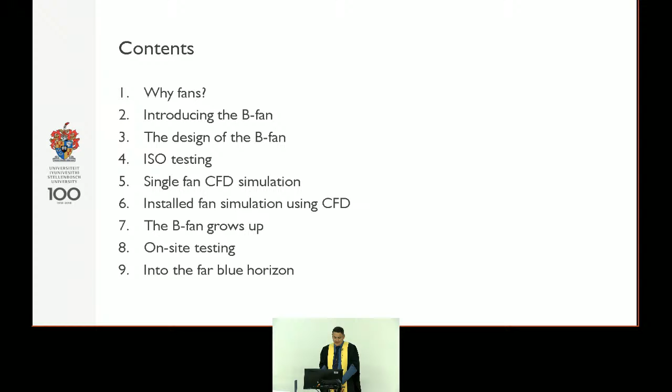So I always have to say what I'm going to say. A bit of background: why are we doing fans and what does the fan look like? Then we're going to talk about the B fan, and then we have to go technical a bit. I'm sorry, there will be some integrals and stuff, and look at the design, how we test it, and then how we simulated it. François, you're going to feature heavily here. And then some more simulation, and then eventually where we actually ended up installing it. And then where are we going with this?

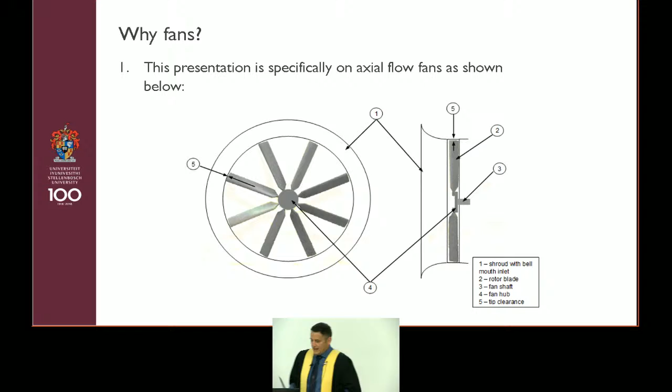So when I talk about a fan, I quickly ran into the office. I had to grab a fan blade. This is something that a student printed a few years ago. The most important thing is that if you look at the blade, it has got an airfoil profile. So it looks like a wing. It's got a wing shape. If you look at the fan itself, it's quite a simple object. It's not that difficult to imagine.

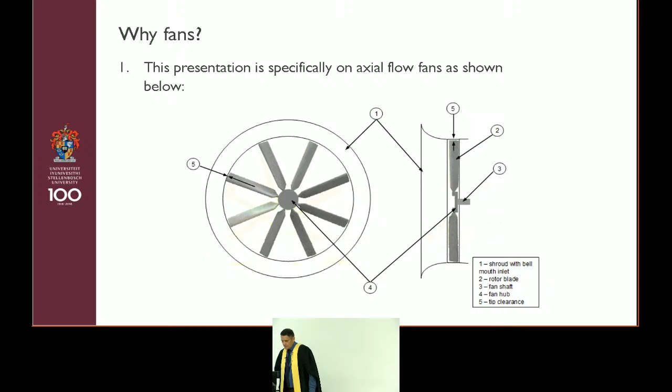This entire component is called the rotor, because it rotates. It's got a shaft, and that little bit in the middle is called the hub, where we attach the blades. And then we've got the rotor blades over there, and they sit in a casing, which we also call a shroud. In this instance, the casing has got a bell mouth, so it's got a nice inlet to reduce the losses, so the flow likes coming into the fan. And then, importantly, between the blade and the casing, there's a clearance that we refer to as the tip clearance, and that also plays quite an important role in the design process.

This first bit of information: I have known about this paper for about 10 years now, that was written on fan energy consumption, or electricity consumption, actually, in Europe. And when I knew I had to do the speech, I ordered the paper from Fraunhofer in Germany, and it arrived about 2 months ago. The astounding thing is that they reckoned in 2002 already that axial flow fans in Europe consume 200 billion kilowatt hours of electricity in a year. To put that into perspective, I quickly jumped onto the wonderful internet Google. In South Africa, we consume more or less, depending on who you speak to, the same amount of electricity in a year. And the other thing that's important, the Europeans reckon they can save about 10 to 20% of this energy by just improving the design of the fan.

Now, why is a fan so important for us? Fans give us the ability to remove heat from an object by means of convective heat transfer. Convective heat transfer is what you get when air or water flows over a surface, and then you get the transfer of heat, or reduction or increase in temperature. And we can do that without using water. So we just blow air over an object.

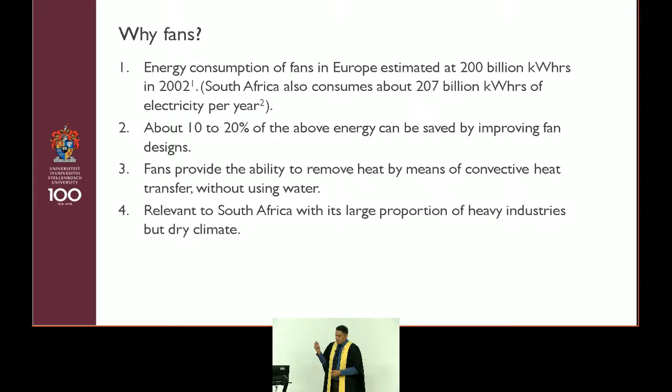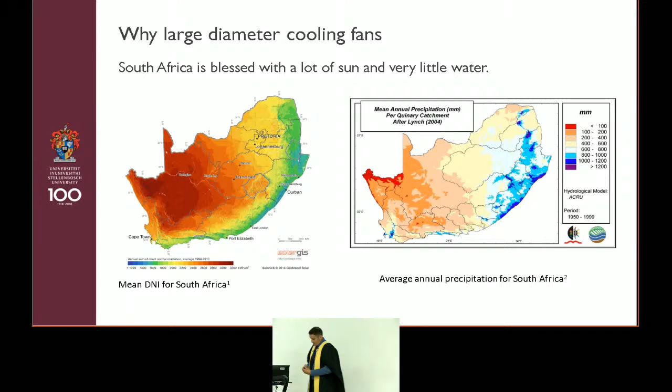So how a power station works: you take coal, burn the coal, you create steam. The steam is under pressure. You run the steam over a turbine that generates electricity. But to complete the cycle, so this is where the thermodynamics come in, you actually need to condense the steam back to water. And in South Africa, what we've managed to do at a very big scale is to use fans to do that condensation. In this specific power station, there are 288 of these fans. Each of them has a diameter of about 10 meters, and it's 45 meters above ground level. I don't know who of you have been 45 meters above ground. It's an interesting experience.

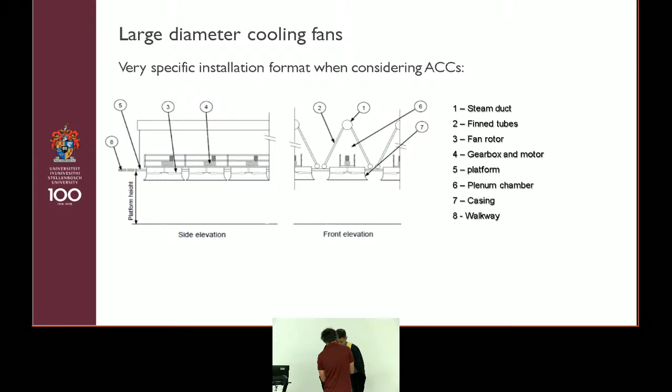So just looking at the picture, what does such an installation look like? Most importantly, the fan. The fan is what we're talking about. You've got the fan over there, and then above the fan you have these fin tube bundles. They're arranged in an A-frame format, and this is where the steam gets condensed. Up here at the top is where the steam enters, gets condensed to water, and gets pulled back into the power station. So you actually conserve the water. You don't evaporate the water into the atmosphere.

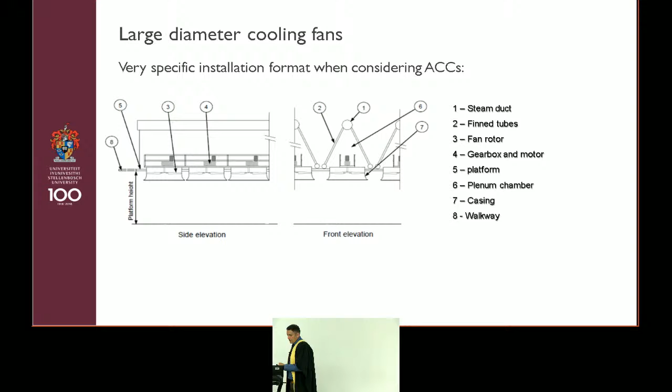One of the problems they have with these fans is when the wind blows over this power station, the fans that sit at the side of the power station. Normally the air would go through the fan like this. When the wind blows, that big fan sitting there at the side actually experiences what they refer to as distorted inlet flow. So it struggles to get air through. And you get all kinds of problems with the ability of the plant.

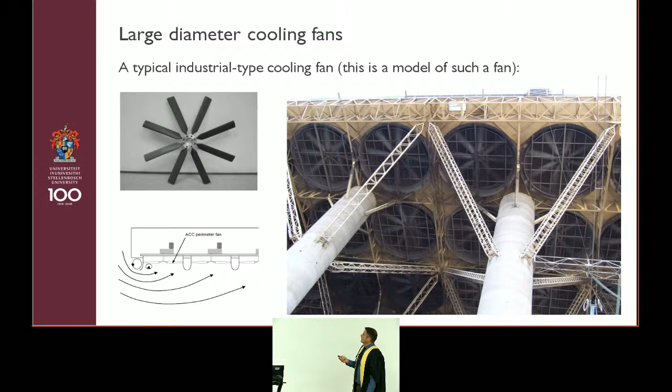If you actually visit these power plants, the people who run them will tell you that getting them to run stably was initially one of the issues. And the South Africans are really, really good at being able to run these power plants with wind blowing over them. But you do have occurrences where things can become a problem, and you can lose a bit of electricity, and I don't want to say too much, but it can typically lead to load shedding.

So back in 2005, Johann Bredell actually published a paper. What he showed in the paper is that looking at different fans, you can find that they behave differently when they're exposed to this distorted inlet flow. This is a measure which we define as the volumetric effectiveness, where we compare the volume flow going through the fan to the volume flow that would go through the fan under normal conditions, when it's just sitting out there on its own happily. You can see that the different fans behave differently. This is given as platform height, but it actually represents distortion of the inlet flow.

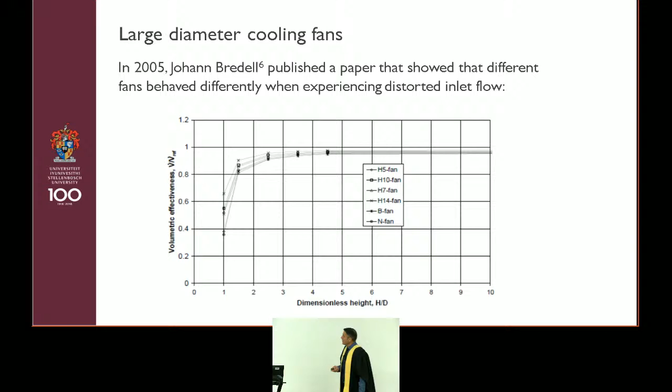And over there, you see a name already appearing. Part of this work showed that there's some potential in this fan that we refer to as the B fan. So enter the B fan. This is our star. The fan was designed by a person called Phillipe Bruneau. We have a bit of a thing going where we tend to name our fans after the people who designed them. So this was called the B fan.

It actually started as two fans: a B1 fan and a B2 fan. The only difference between the two was the profile of the fan blade. The B1 fan had what is referred to as the Clark Y profile, and the B2 fan had a NASA LS profile. The one was supposed to do better than the other, and there's just a small difference in the performance of the fan. The fan was designed to a very specific specification, which is actually a scaled power plant spec. It's scaled from an existing power plant to the size of the test facility that we have here at the university.

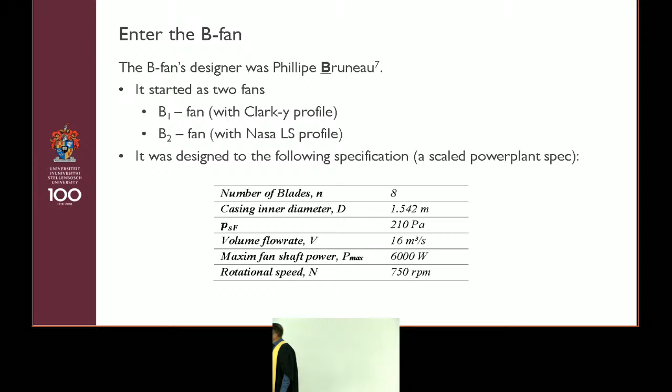The important thing is the pressure: 200 pascals sounds like a lot, but if you measure it in water, it's 20 millimeters of water, so it's nothing. There was a volume flow rate, a certain fan shaft power and a rotational speed that it had to adhere to. So this is where the equations come in.

When you design a fan, you start with the velocity triangles. I say to the students, when you do turbo machinery, there are a few things you need to know, and the first thing is velocity triangles. The velocity triangles show the behavior of this rotating blade. So you can in your mind actually see this blade moving through the air. If you stand to the side, and this is what I teach my students, if you get this, you're very good. You can go to third year.

So Johan, this is preparation for your exam in 2 weeks' time.

When you stand to the side in what we refer to as the absolute reference frame, you will see the air moving straight into the fan. Or it can be distorted, but let's say straight.

But this blade is actually rotating at a speed, which we write as omega R, where omega is the radians per second, the RPM, the speed at which the fan runs, and R is the radius of the fan blade, so at different places it has different radii. Put that together and you get the relative flow, the relative angle at which the flow is going to see this blade as it moves.

The flow will go over the blade, and hopefully it's well designed, so it will follow the blade nicely, and it's going to leave the blade at a relative vector W2. But you standing to the side, you're not sitting on the fan blade, so what are you going to see? To see the absolute vector, you need to add that rotational speed, omega R, to that relative vector, and then you get your absolute vector. This is what you will see if you stand to the side.

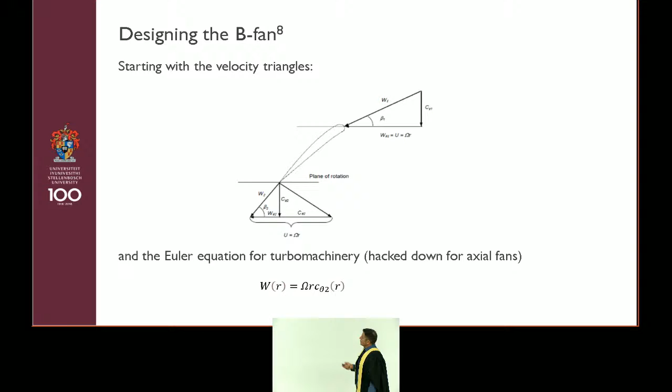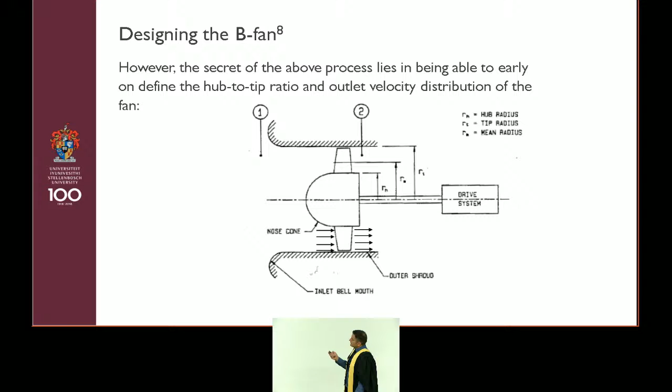When you design the fan, you first want to figure out what the size of the hub of this inner part is going to be, because once you have that, you know what the length of the blade is going to be. If you've got the length of the blade, then you can design the velocity distribution along the blade. If you've got the velocity distribution, you know what the energy transfer is going to be. If you know the energy transfer and you've got the efficiency, you can work back to the pressure rise. Okay, so we need to know what the hub diameter is going to be.

There was a guy called, I can't remember his first name, Fransje, you've still got the book. Van Niekerk. His surname is Van Niekerk. He published, actually in 1950, I think his thesis was published in about 1956 or 58, a work on how he developed this equation to calculate the optimum hub diameter of a fan for certain lift to drag ratios, for a certain amount of swirl at the hub. The swirl at the hub is that C theta 2 that you would exert at the hub, and then the flow coefficient at the tip, all depending on the design parameters that you want. From his equation you could get an optimum hub to tip ratio for a certain efficiency that you want for the fan, and that gives you the size of the hub.

Note that there's actually a limit to the amount of swirl you can put at the hub, because that helps you to solve it. Otherwise, you're going to be very busy and design fans that don't work as they should. So there's a limit to the amount of swirl you can exert at the hub of the fan. Wallis is also quite a popular author, used to be, on axial flow fans. He prescribed a limit of 1.1 for this swirl at the hub.

An interesting thing, there's quite a well-known textbook by Dixon that they use in turbo machinery. In that international textbook, there are only 2 South African names that I could find over the years. One of them is actually Van Niekerk, and the other is Professor Graham Smith at UKZN. They actually get referenced in that textbook.

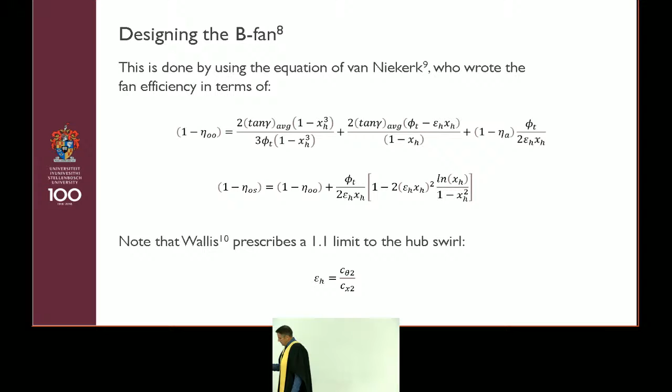So now we've got the hub tip ratio, and then it actually is just mathematics. We now need to design the outlet swirl angle, our swirl distribution. You can assume different equations for the swirl distribution. We usually use the format A R to the power N. Then we have what we call the simple radial equilibrium, which basically balances the flow distribution, the swirl, and the axial flow through the fan with the pressure distribution over the fan blade. It's an equation that balances all the forces in the radial direction, and from there you can see what the velocity distribution in the fan would look like. Then you get an equation for the total pressure downstream of the fan, which is given by that, and this is where we integrate.

So I always believe if you spend 2 years learning integration, you need to use it somewhere, so we need to integrate. And the other question is, what is an integral? It's a very, very elegant summation. What we actually do with the integral is just sum that together over all the different radii. And if you're not a clever engineer, like me, you can do this integral in parts: you just break the blade into different radii and add the different energies together. So then we can calculate.

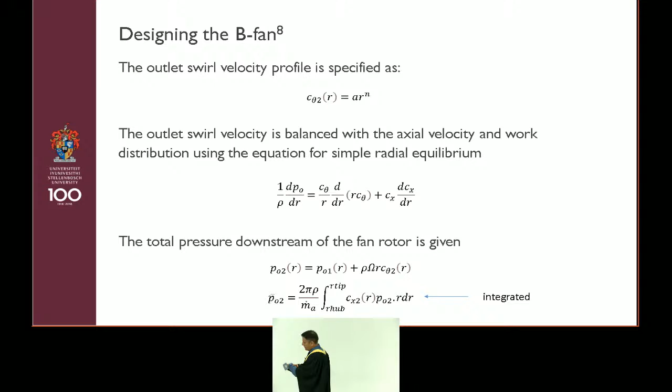So for our cooling fans, we like working with what we refer to as the fan static pressure. The fan static pressure is the difference between the static pressure downstream of the fan and the total pressure upstream of the fan. And why that is, is because in our installed condition, when this fan works in the power plant, the energy that's downstream of the fan is actually lost. I know there are a lot of contentious issues around what actually happens to it, but for our purposes, the energy is gone. That's why we work with fan static pressure, and to people who are not really familiar with fans, it can create a lot of confusion, because that term actually means total to static and not just static.

Then we have the dynamic pressure downstream of the fan. To get that static, we take the total pressure that we had on the previous page, subtract the dynamic pressure, and we get our static pressure downstream of the fan, and once again we integrate that over the blade. Then we can have a theoretical fan static efficiency, which is basically what we get compared to the ideal, the maximum we can get, which is the fan static pressure compared to the fan total pressure. At this stage, there are no losses in these equations. The losses come later.

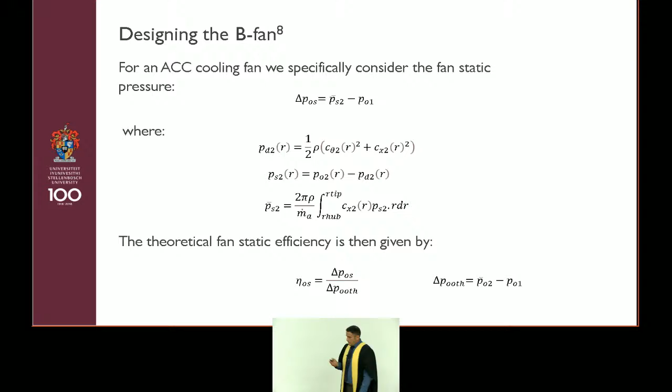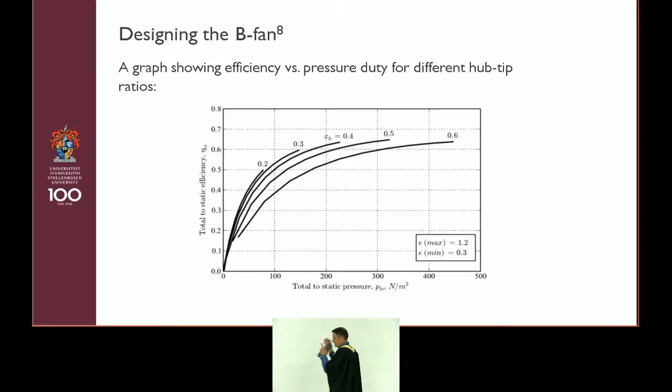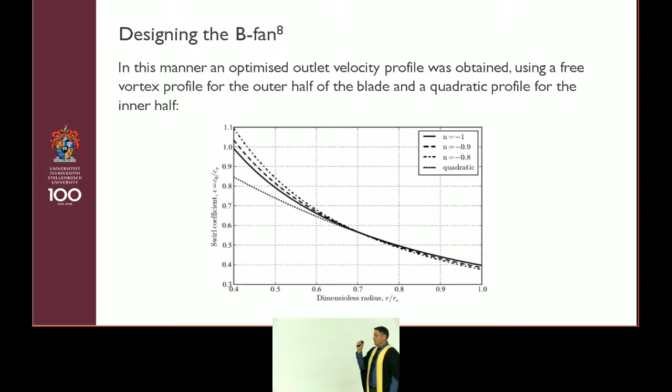And then once he's done that, he ended up with a velocity profile which was a combination of what we refer to as a free vortex profile towards the tip, and towards the hub he had a quadratic profile over the inner half, and that limited the amount of swirl at the hub. So I must be careful what I say. Francois and I wrote a paper about Philip's design in 2012, and we found there was a small mistake, but the fan was still performing, so it's fine.

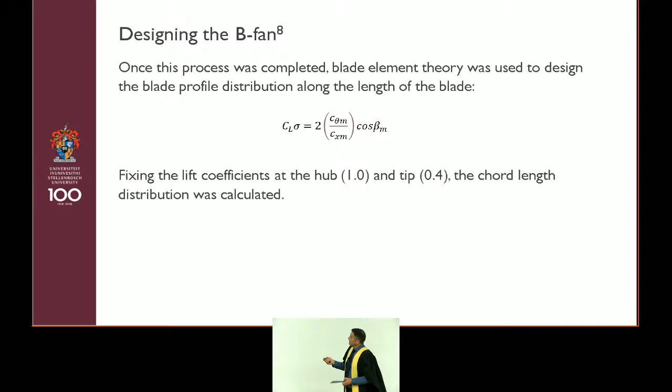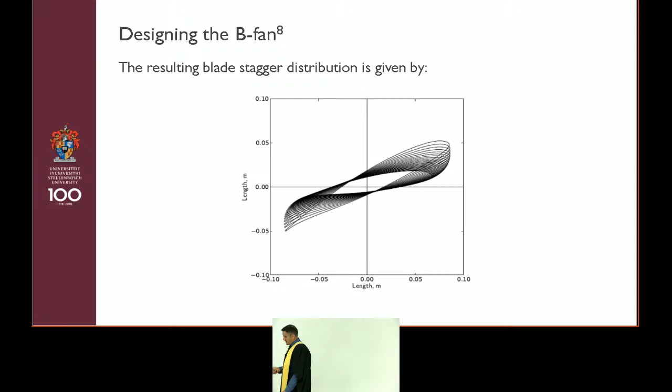And I've spent many hours sitting there literally with a vernier, measuring the length of the profiles in Philip's thesis, because at that stage things weren't as electronic as they are today. And then Philip ended up with a fan.

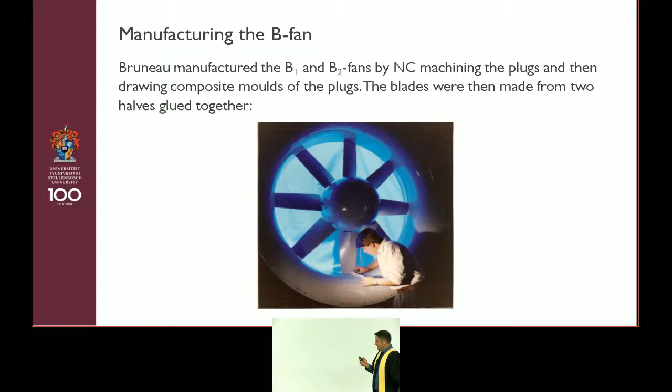When the blade rotates, the flow doesn't go straight through the blade. It actually goes like this over the blade. So you need to create your profiles also at the radius. Philip didn't do that, and we didn't think much of it at that stage. We actually realized later that it had a bit of an influence.

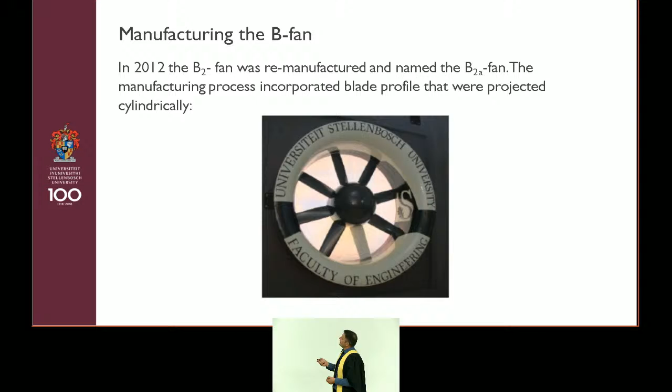And this is a photo in 2012. For different reasons, we destroyed the fan, and we remanufactured the B2 fan. By then we named it the B2A fan. I can go into the history of why we took the B2 fan and not the B1 fan, but there's actually a very simple reason, and I don't want to go into that. It was just easier to manufacture. So we took the B2 fan and we remanufactured it, and we actually wrapped it.

It is referred to as the B2A fan. A lot of this manufacturing was done by Francois in his PhD. He also took this very nice photo. It doesn't look exactly like this anymore because we've scraped off a lot of the paint on the inside, but someday we should repair it for the photo again.

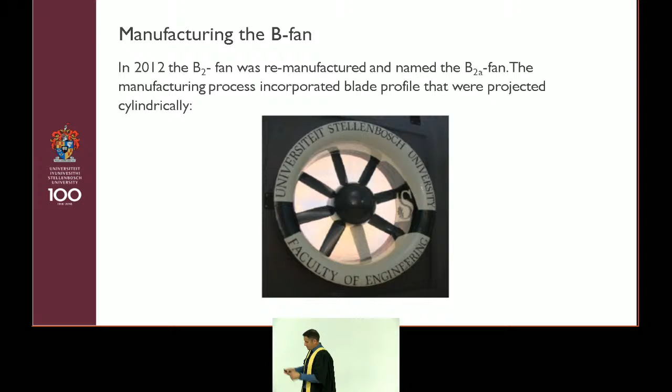This fan, the specific B2A fan, we still use quite a lot in our work. And what has happened since then is that people just started referring to the B fan. B2, B2A, B1, it just becomes too complicated, and now we just refer to it as the B fan.

We tested it. Just look at the time, we're still good. We tested it in this ISO 5801 type A fan test facility, and type A means that we tested to get fan static pressure, specifically related to that static pressure definition that I mentioned earlier.

Actually, I see Gerard here. This facility was built by Gerard's elder brother Sarel as part of his PhD, way back in 1990 already. Since then, Kobus actually helped when we put up a roof over here. It's still running, and it's still in quite good condition.

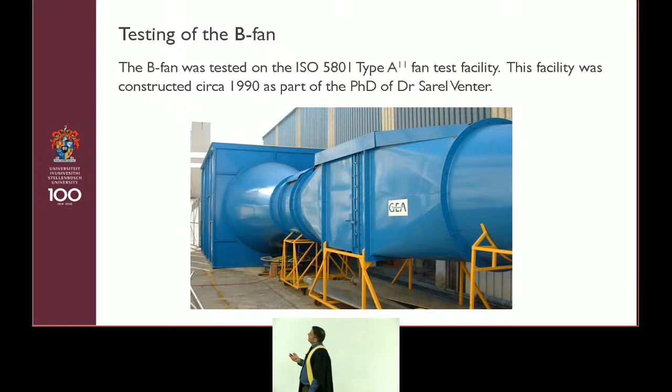So what does the test facility look like? Importantly, our test fan sits here at the back of the facility, because we're trying to simulate the effect where the fan blows air out into the atmosphere and we lose all that energy. Upstream of the fan we have this settling chamber, and this is where we measure the pressure. We measure the pressure at the side of this room relative to the atmosphere, and that tells us what the pressure rise of the fan is going to be.

Oh, there are a few other things you need to add. To know how much air is going through the fan, we have another bell mouth. This bell mouth is the one that goes with the fan. The bell mouth at the front there is where we measure the flow rate. I wish I could have had my student here, because the other day I had to explain to him how a Bernoulli flow meter works. This is what they call a Bernoulli flow meter, and it's a means of measuring the flow rate.

And all these things, the settling chamber and this ducting in front of the fan, actually mean that we lose some energy in the process of testing the fan.

So to overcome that energy we lose, we've got the booster fan here. And the booster fan, all it does, it just puts back the energy that we lose due to the fact that we're testing the fan. So we can actually then test the fan to a point where there's no pressure difference over the fan by using that booster fan. You'll see it in the graphs.

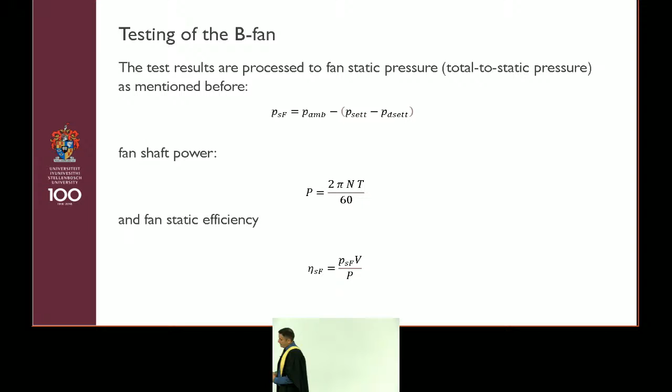So we actually saw that we really struggled to make it work. So what we then did is we tried to model the fan in what we call CFD, which is computational fluid dynamics,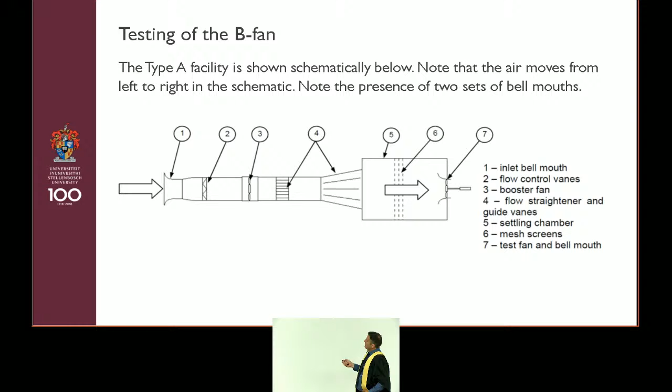So it represents this chamber upstream of the fan, and then this big outlet which goes into the atmosphere. And this was done using specific software, ANSYS Fluent. We did numerous investigations on this. We tried different software packages. We tried Numeca, we tried Fluent, and we tried Fluent again. By the time we got it right, it was ANSYS.

Actually, the first person who got the calculations right was Francois, and I distinctly remember showing this to my co-supervisor for my PhD, Professor Detlef Kröger. I showed him the first time we got these simulations right, and Detlef said, "Okay, you're done. I'm happy. We managed to do it."

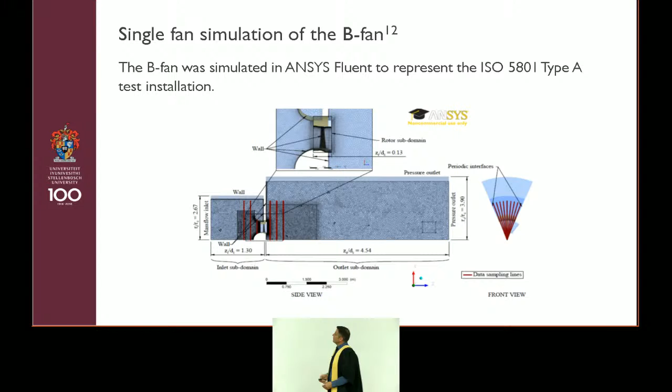So the simulation represents this fan blade. So there you can see a nice model of the fan blade. There are 8 blades, but you don't need to model all 8 of them. You only need to model one, because all the rest do the same as that one. So you just model one and you add all of them together. You can see some specifications for the cells. We actually used hexahedrals, which gives a very nice mesh over the fan. It's a very efficient way of actually solving the flow of the fan blade.

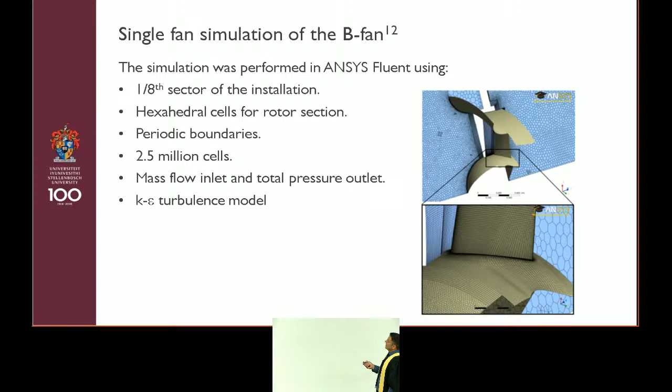And what we did is, for our model on the previous page, we said we've got a certain mass flow going in here, and we monitored the pressure rise over the fan. And then we got these results. So on the left, you would see these are the original test curves that come from Philip's work, and these are the test curves that were published in, I think this was in 2014's ASME paper, Francois, if I'm not mistaken. And you can actually see numerous tests, a large number of tests, and you can actually see the CFD correlating quite well with the test results.

And that is actually where we did that wrapping of the fan blade onto the cylinder. That was why we eventually managed to get this simulation right. The fact that the fan blade profiles were straight compared to wrapping them made a 1 degree difference in the effective angle of the fan blade, and that's why we couldn't get these things to correlate. In any case, so we got that.

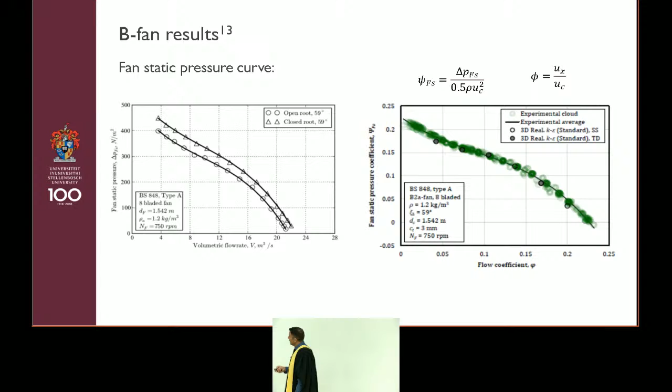Then, but that was not finished. So the eventual aim, by then, we were quite set on, the intention was to get this fan into a power plant. So then we simulated the fan in an installed condition.

So this is simulating the fan inside an air-cooled condenser installation. And you can see there's our A-frame, there's our fan at the bottom there. But you remember we said they've got about 288 of these fans installed, so you can't do just one, you have to do many of them.

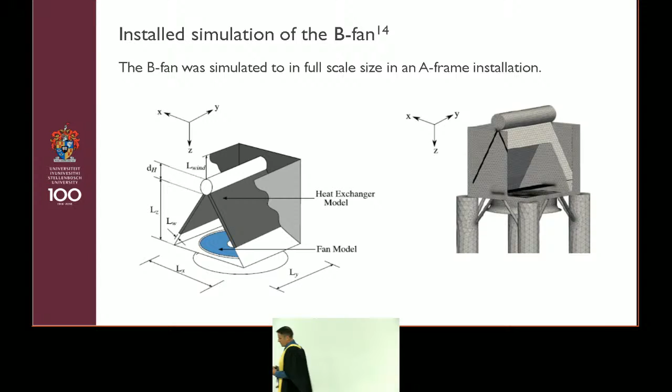And the way to do that, you can't model each little fan blade element if you want to model 288 fans, so in this case we actually did 30 fans. You actually represent this fan blade by forces. So remember I said this is just an aircraft wing, and this wing has got a certain lift and a certain drag

profile. So you can actually break that back into little wing profiles. You can work that back into force elements and then say in your simulation, I'm not going to model the fan blade, I'm just going to add the forces in my simulation based on what I know about wing profiles and the ability of the fan blade to actually generate lift.

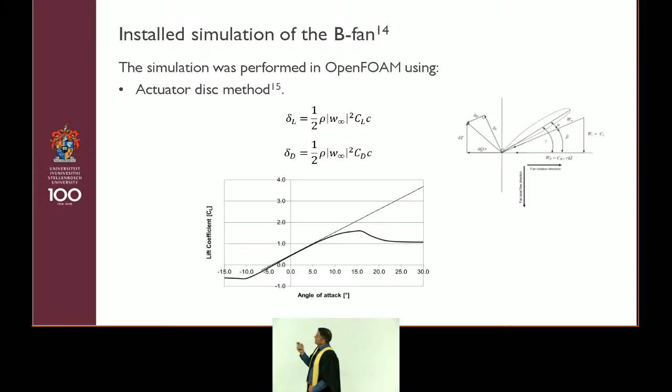You can see that straight line actually means something there, and that is the effect of, in a rotation, when the blade is rotating, you actually get the effect of this lift being extended. It doesn't stall as easily. And we incorporated that into the model. This was work done by Johan Engelbrecht in his PhD.

He built an ACC of 30 fans, and he modeled the effect of wind over the ACC. Think back right at the beginning, I said to you, we saw that different fans behave differently under wind. You can see there's the mesh of our CFD, the same principle that we had with our little flow elements, all that stuff. The wind going over the ACC, and he then looked at how much air is actually going to go through the fan. So we can see what the effect of this distortion is going to be on the fan.

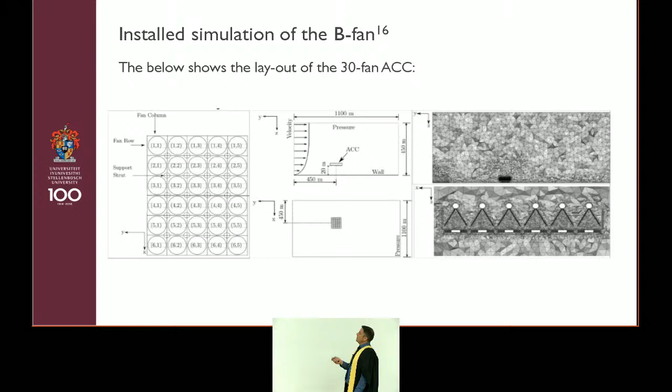And we compared three different configurations. We had what we refer to as our A fan, which is the industry fan. I showed you the picture at the beginning. We had our B fan, which is our champion. And then we combined the two. We said, well, maybe you want to save a bit of cost. What's going to happen if you only put the B fans at the side of your plant where you know the wind effect's going to be quite bad?

There are many comparisons, but the one that says the most is the one where you compare the power absorbed by the fan to the amount of heat transferred by the air. And you can clearly see that our B fan gave the best results compared to the industry fan and the combination of the two. So this came from Johan's work.

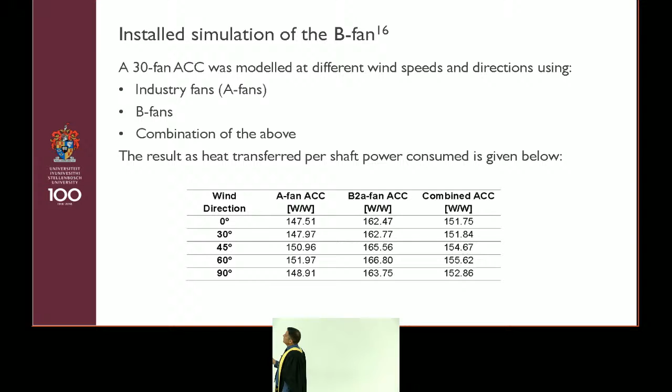And then we were quite fortunate or privileged by the help of our industry partners. I know Albert and Hanu actually put quite an effort into us being able to get this project. We got a funded project from the European Union. We call it the MinwaterCSP project, and this enabled us to actually manufacture the fan. So now we've tested scaled fans.

I mean, we've been testing, Philip did the first test in '92, '93, and so now we were at about 2015, and we got to 2016, and we actually got the opportunity to build this fan in its full size of 10 meters. The fan was manufactured by a company, and I don't know where Chris is. I specifically said to him he had to be here. It was my other colleague, Chris Meyer. A company, NOTUS Fan Engineering, built the fan, constructed the fan.

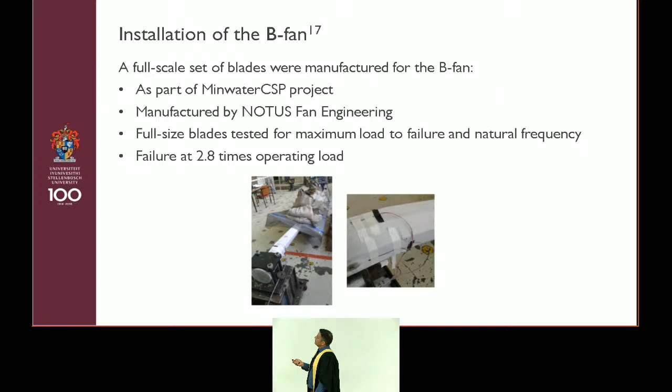We loaded it with sandbags on the blade. We clamped it down at the one end, and we loaded it with sandbags, and we saw that it failed at about 2.8 times the operating load of the fan, so we knew we would be relatively safe. And then we installed the fan.

So this is quite a famous picture that we took of the fan installation. The person who took the picture was Francois. And if you actually see there, that arm sticking out there is actually Donnie Els, and that's Chris Meyer and me, and another Francois, Nel, is actually an ex-student of Eskom, and we actually installed the fan at Matimba.

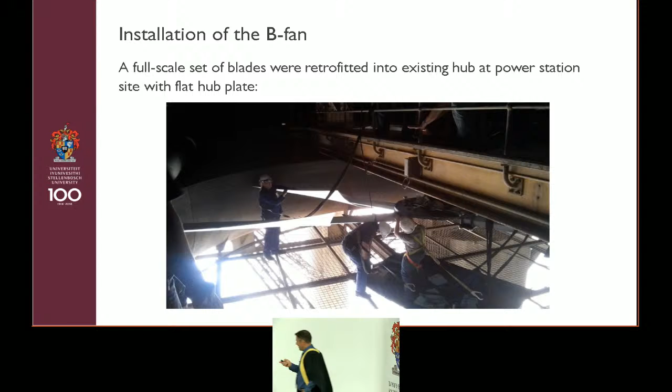It's quite an experience. You stand on this grid, it's 4 millimeters thick, and you've got 45 meters of air underneath you. So this work was actually supposed to be done by Eskom, but they couldn't. So we ended up doing it. And this was the fan installed, so I hope it's going to run. I checked this morning. So let me just tell the story before I run the video.

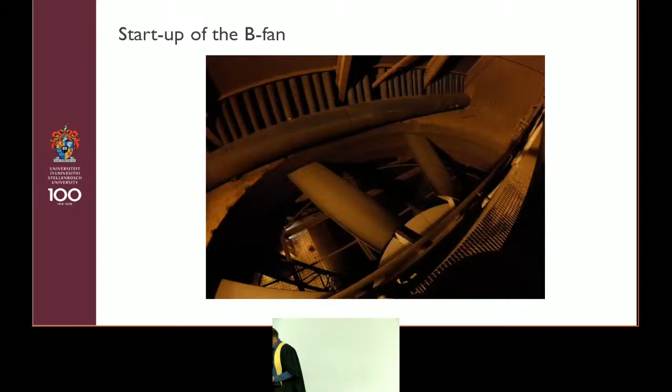So they switched the fan on, and we were not there because, for safety, we were standing 45 meters below, looking at the fan. They switched it on, and then they radioed us and said there's a problem with the fan. It's not pulling amps. So we all walked up. We got there and said, stop the fan, and Francois put his camera out there, and they switched it on again, and this was actually taken, and that's the fan running. So that was the second time they ran the fan.

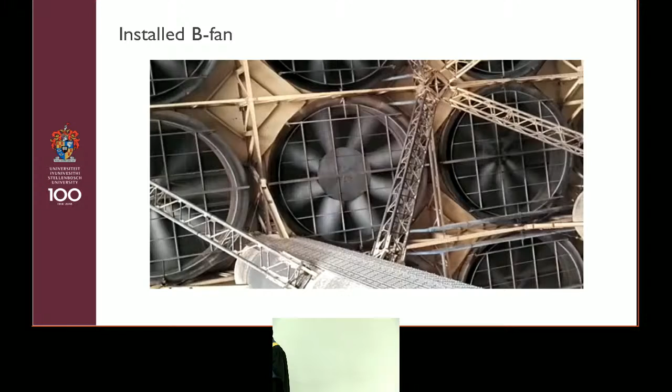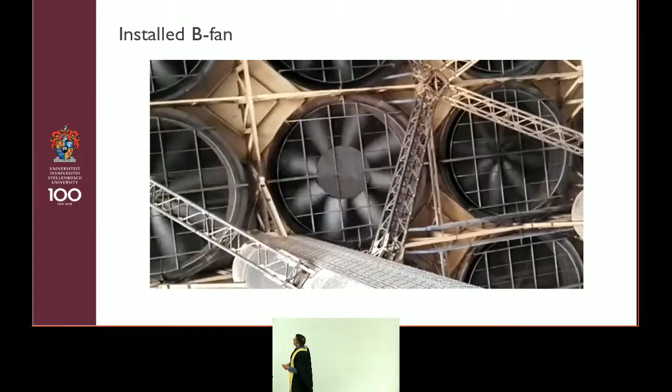What we realized afterwards, when they phoned us and said that the fan is not pulling amps, was that the difference in amps was more or less the increase in efficiency of the fan. So actually, it was quite good. And this is a photo from the bottom. Actually, this was taken, I think, the next morning. We were quite tired after doing that. That photo was taken about 7:30, 8 o'clock at night, the previous one, when we got it to run. And you can see the fan running in the power plant.

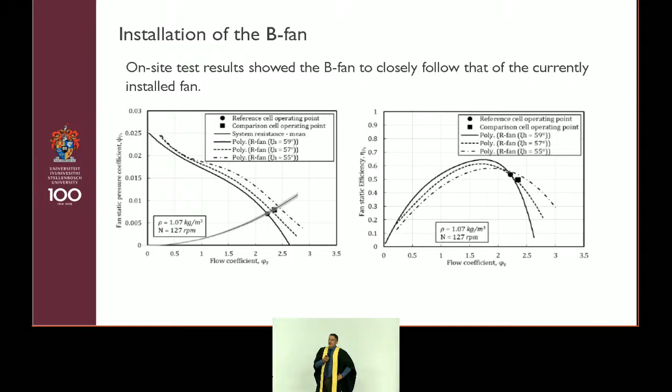And what is quite unique is that this fan has been running since October 2016, so five years and two weeks ago, and it's been running ever since. Okay, nothing is perfect, there are one or two issues, but it's still running, so it's still at the plant.

We were quite thorough, so we did some measurements to compare the fan's performance. We installed anemometers on the plant to measure the flow rate through the fan to make sure that it performs as it's supposed to. You can see there's a small difference between what we expected the volume flow rate to be and the actual volume flow rate through the fan, but the fan is doing what it's supposed to do.

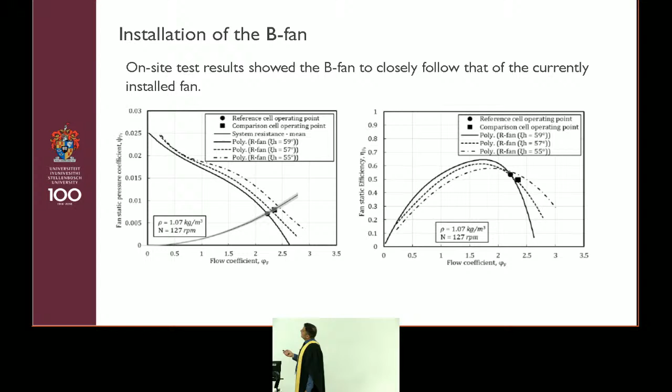So, to conclude, we designed, or Philip actually designed, a large diameter axial flow fan. We tested the fan numerous times over many years, and we eventually manufactured the fan locally. So it's quite important to realize this fan was developed here, it was manufactured here, and it is tested here. So everything was done locally.

And we ended up with a fan with a relatively large hub diameter, for which we actually got some criticism, and there was a bit of engineering involved to make it work, because you sit with quite a large disk that you had to install eventually. The efficiency was above 60%. We didn't think much of it until we started realizing that it's quite good.

At one conference, we were quoting efficiency values of 65%, and people came to us and said, we contest that. We don't think it's really possible, and it is actually possible. We showed that the fan outperforms other fans in the ACC when we simulated it. The on-site installation showed that the fan performed as expected, and most importantly, it showed that we can do it locally.

And then finally, the purpose of the university is not conquering the fan industry. I think that should be made quite clear. We don't want to be in the fan manufacturing industry, but our focus is to create opportunities for our students, our researchers, and then for local industry with projects like this.

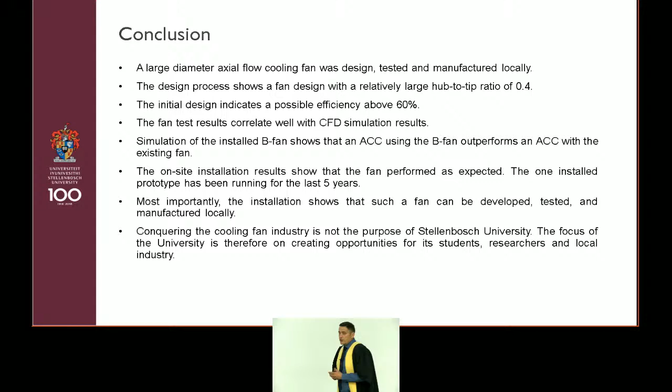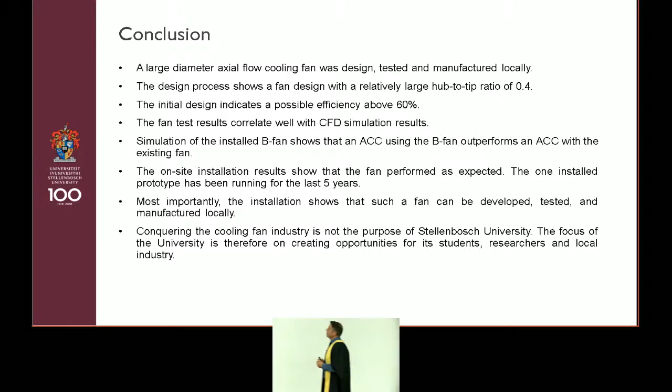Just some references, and then acknowledgements specifically to the work. I want to thank the many persons and companies that were involved and contributed towards this work over the last 30 years. Not least of all, the postgraduate students and the researchers. It was not just me, there are many researchers that spent hours on this, and they tried to show the merit of what was a relatively simple piece of engineering work. Many of the persons, if you want the names, are mentioned in the references.

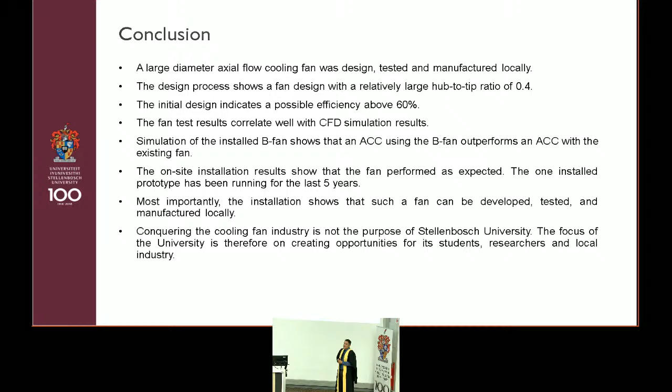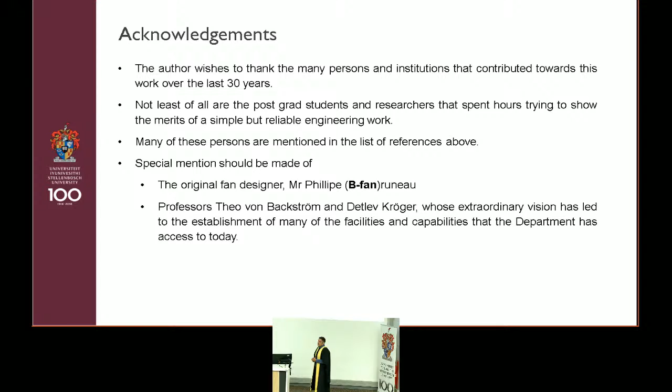A special mention should be made, once again, to the original designer, Mr. Phillipe Bruneau. And then I also want to end by saying a special word to Professor von Backström and Kröger, who are very special to us. Their vision enabled us to do what we're doing today. So with that, thank you very much.